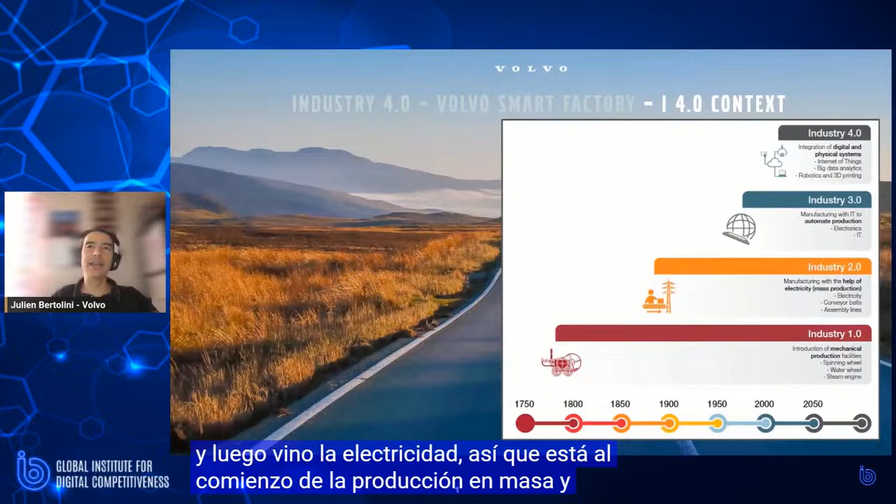And we can think, when we're thinking about Industry 2.0, we can think about Henry Ford, who was a big innovator at this point of time.

The third revolution is the digital revolution. So we are in the Industry 3.0 currently with all the numerical control. We can talk about the PLC, the programmable logic controller, also the enterprise resource planning, all the IT in the factory. And today we're going to talk about the Industry 4.0.

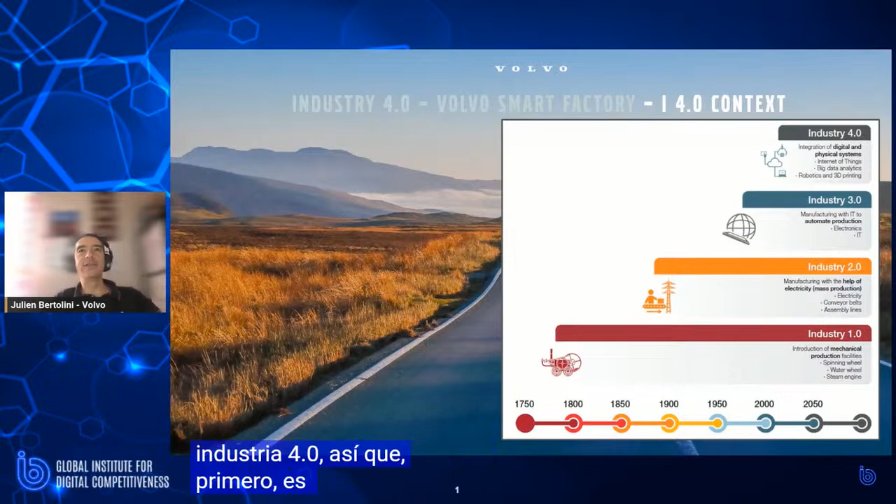So what is it? First, it's a bunch of new technologies. Of course we can talk about IoT, the Internet of Things - I love that because I'm an IoT expert. But there's also other technologies like 3D printing, all the immersive technology with augmented reality and mixed reality. We can also talk about artificial intelligence, about drones. So we have a lot of new technologies that are transforming our industry.

But mainly, the Industry 4.0 is also about customer needs. So it's driven by two things: the new technologies and the new customer needs. And what are these new customer needs? Basically, the industry should be able to produce faster with highly customized products and at a good price. So that's the three challenges for the Industry 4.0.

So now you got what it is and what are the challenges. So let's jump on how to do that - the vision for the Industry 4.0. We can summarize that in 4 pillars.

The first one is flexibility. So our production line should be flexible, meaning that with the same production line, we should be able to create different types of product. That's a big challenge. Second point is reliability.

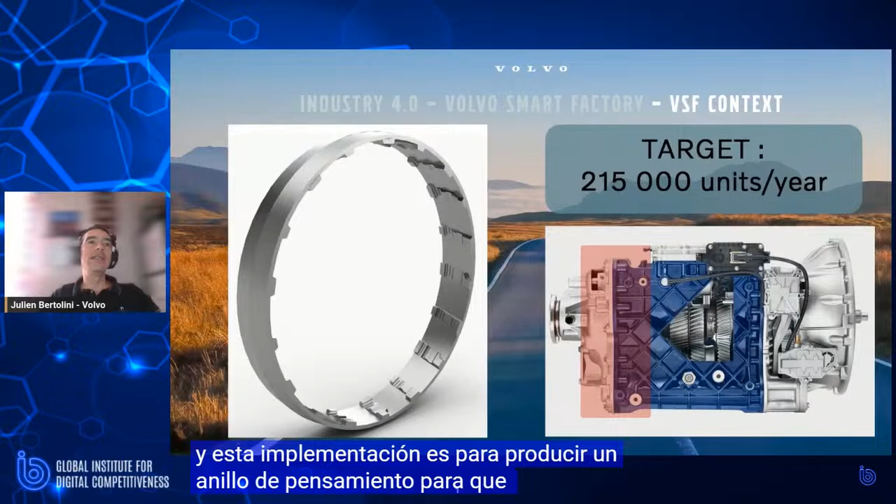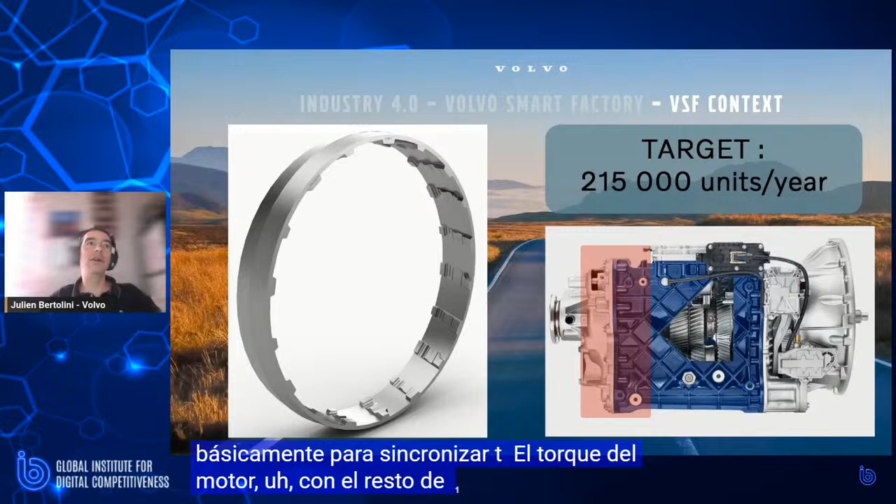And the first implementation is in Sweden, for producing synchro ring. So the synchro ring is this kind of part, and it's a really important part because you need this part in the gearbox, basically to synchronize the torque of the engine with the rest of the gearbox before going to the wheel and to the axles.

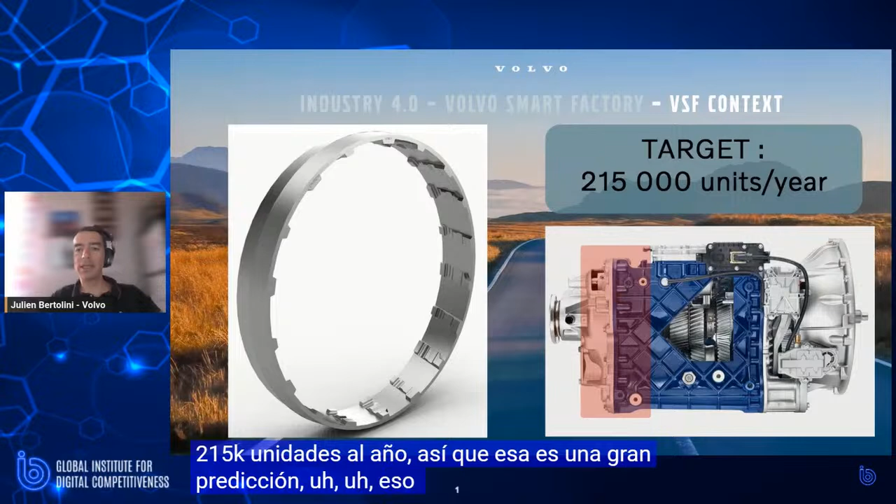So that's a pretty technical part, and we are producing different kinds of parts like that. The target for this new line is to produce 215K units per year, so that's a big production - really ambitious. And we have decided to rise to this challenge to implement an Industry 4.0 assembly line.

So as I told you, the first pillar for the Industry 4.0 is the flexibility. So how have we done that?

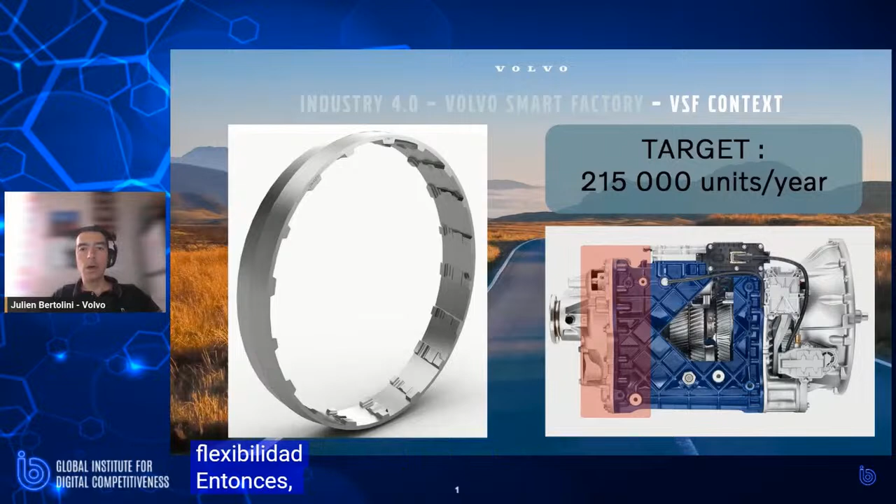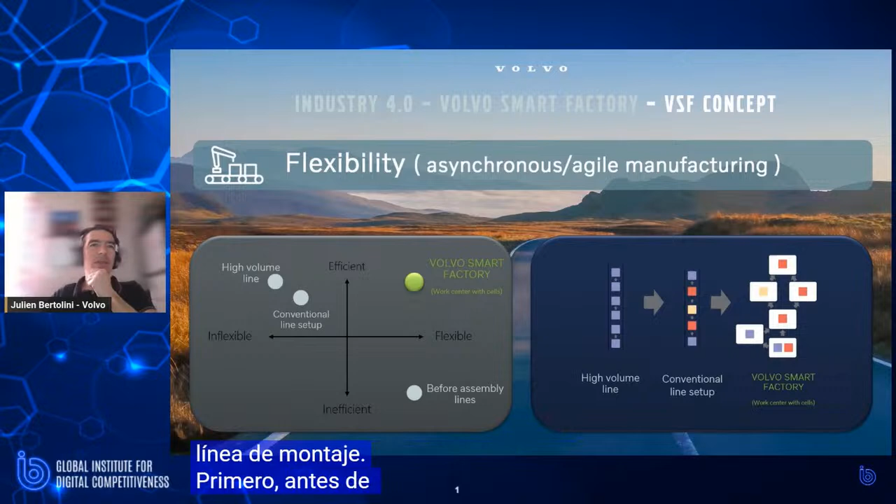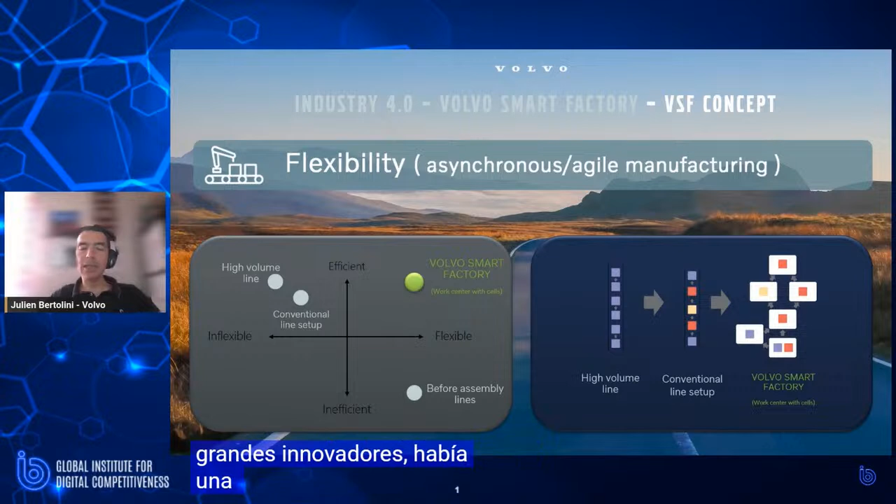So flexibility, if you can think about different kinds of assembly lines. First, before the assembly line, before Henry Ford and all these great innovators, there was just a single individual that would produce the parts by handling all the operations. So it was highly flexible, but not efficient at all.

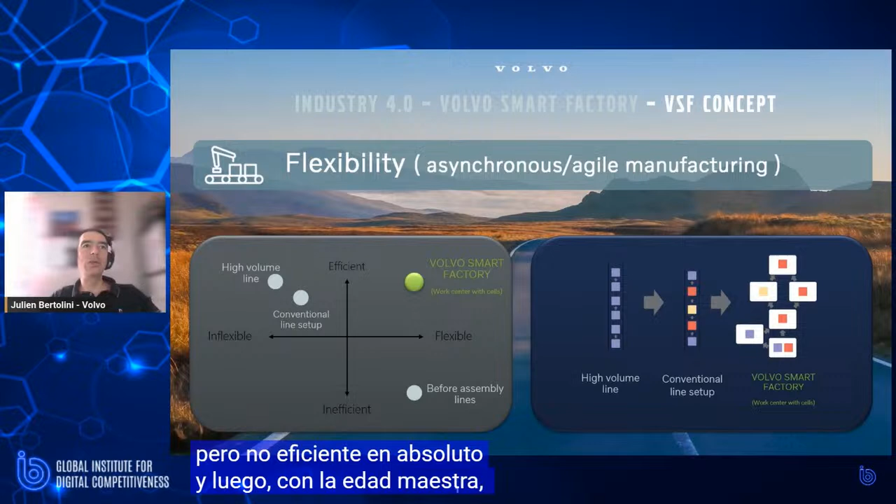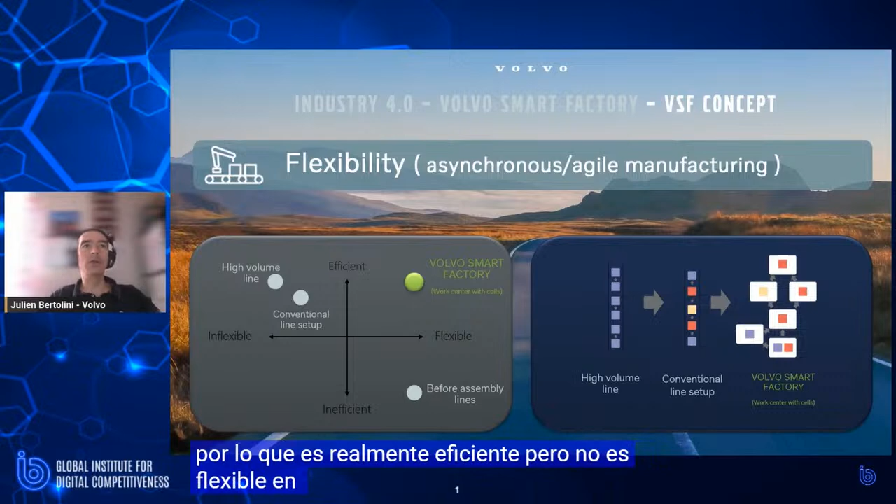Then with mass production, we know how to produce high volume lines. Basically, it's a line to produce standard parts in a very efficient way. So it's really efficient, but not flexible at all. You have to produce just a standard part or a standard product.

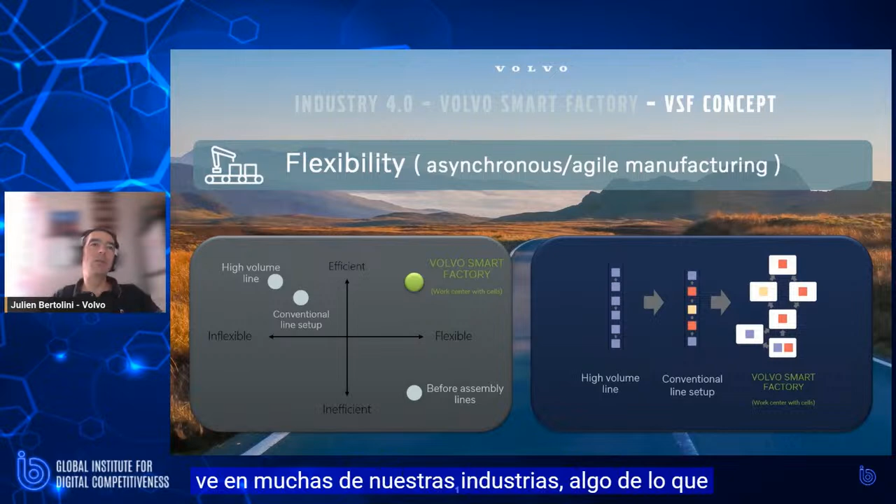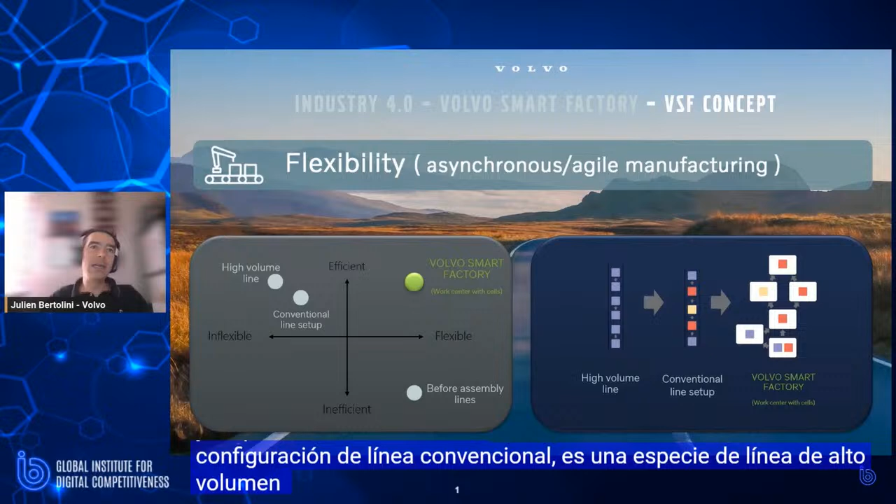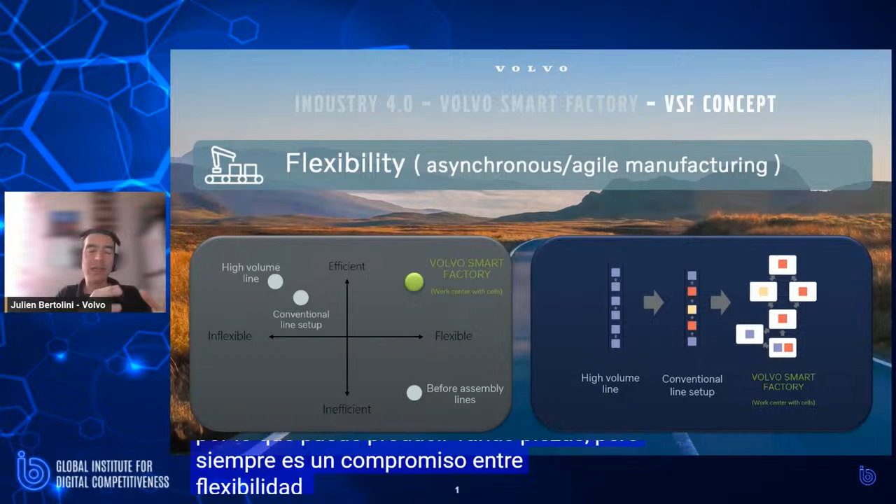Now we can see in a lot of our industries what we call the conventional line setup. What it is, basically, is a kind of high volume line but with some customization. So you can produce several parts, but it's always a compromise between flexibility and efficiency. You have to always make some compromise.

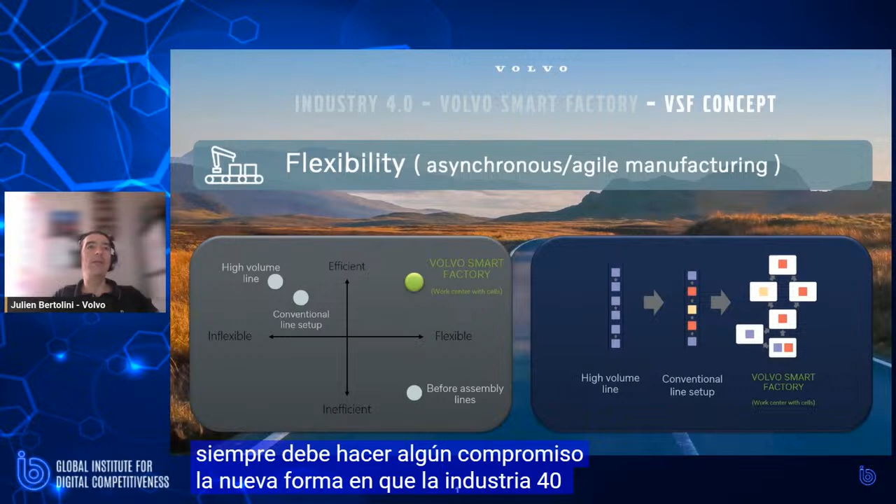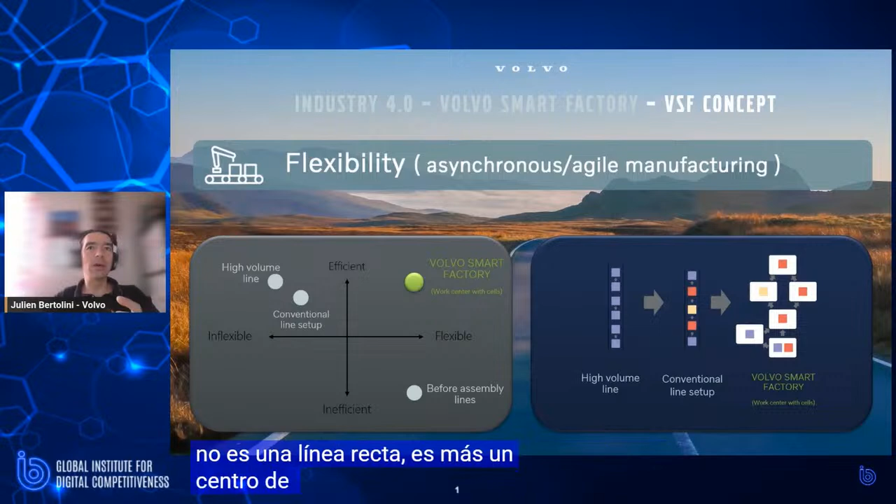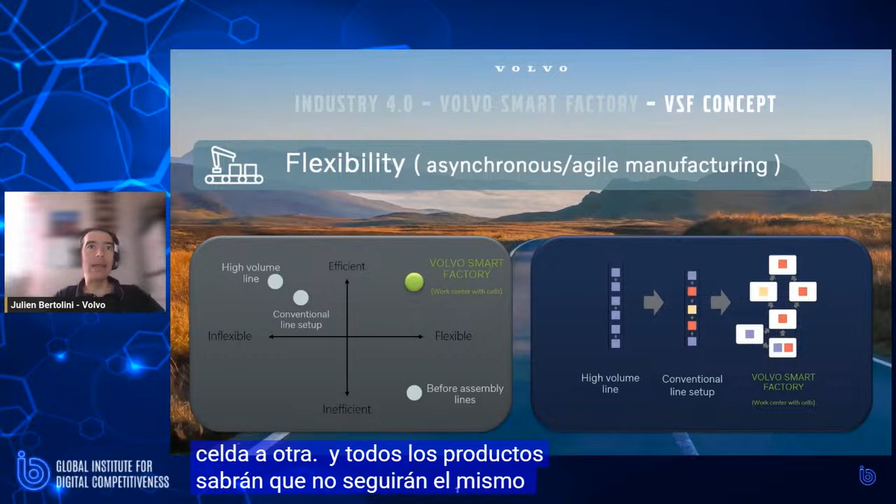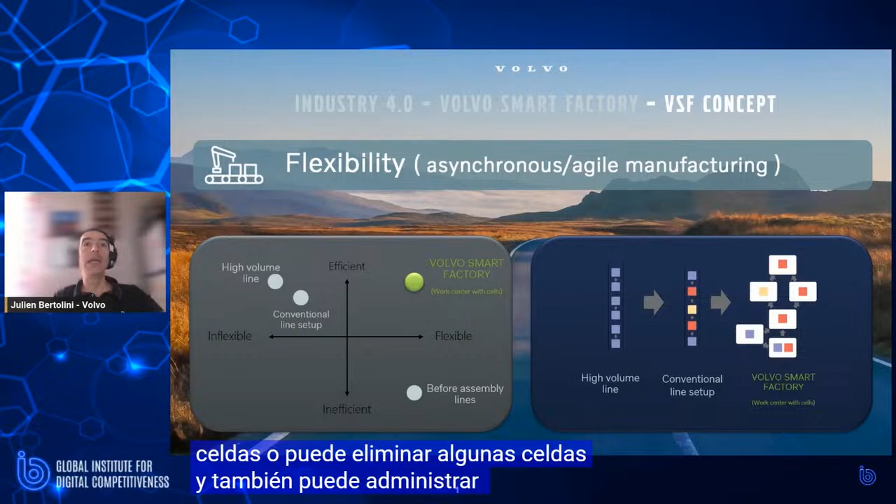The new way, the Industry 4.0 way of building an assembly line, is really different. You are building a line, but it's not a straight line. It's more a work center with different cells. As you can see in this schema, the product will go from one cell to another, and not all products will follow the same path. So it's really flexible, and you can add cells or remove some cells, and you can also manage the redundancy. Keep that in mind.

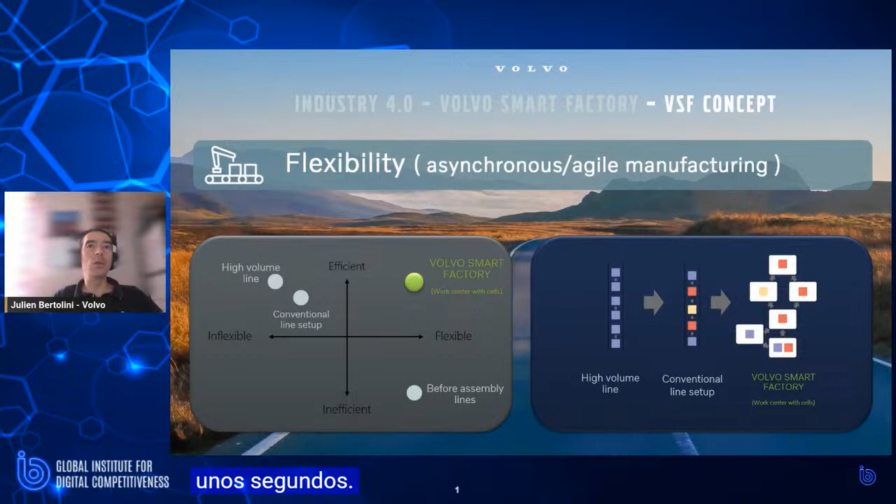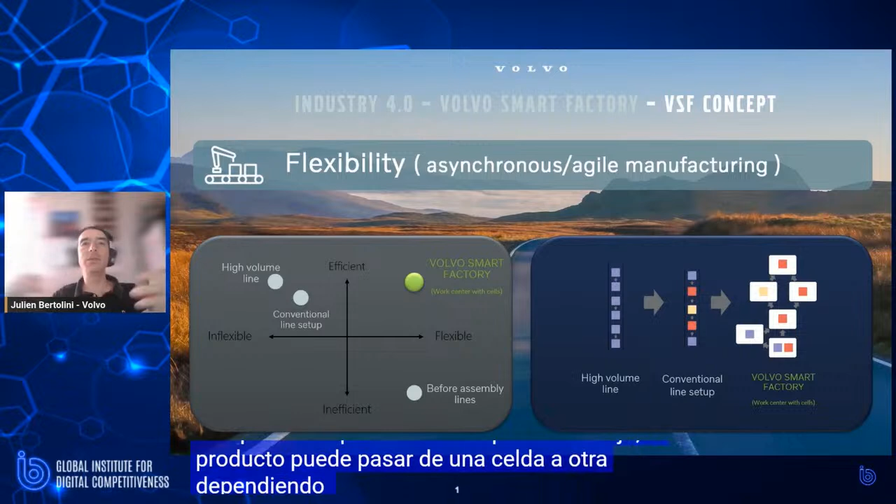I will show you concretely what it is in a few seconds. Just one word I forgot to tell you is asynchronous. Here, the work is asynchronous because you don't need to have a takt time with a fixed cycle time. The product can go from one cell to another depending on the cells available. So the cycle time is not fixed. It's asynchronous, and it's really agile.

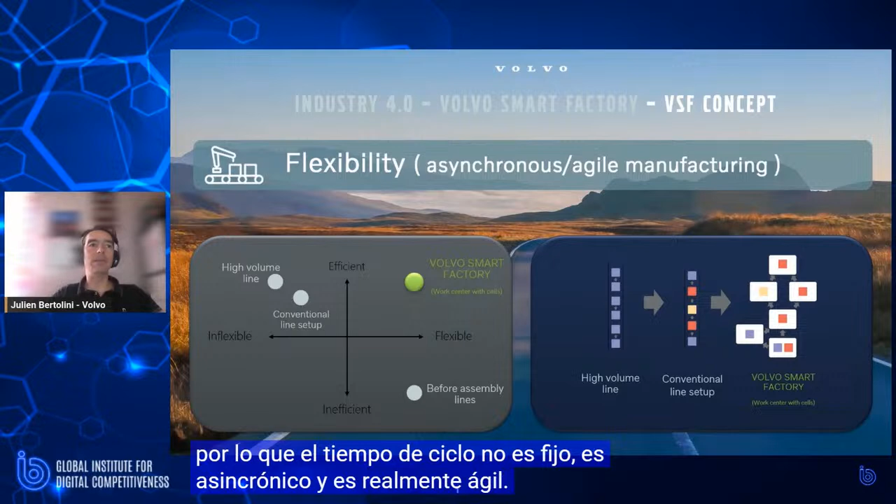About the other pillar, I told you about reliability. So how can you be really reliable? Of course, we have to do some redundancy of critical equipment, and I will give you some detail. You also need to be able to do predictive maintenance. Otherwise you will not be reliable enough.

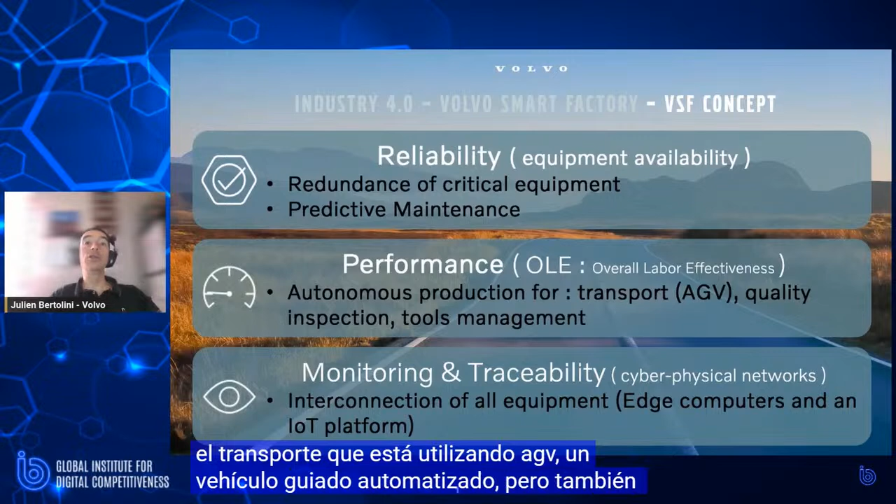For the performance pillar, we have chosen to put some autonomy in - the production needs to be autonomous. So you will see the transport uses AGVs, automated guided vehicles, but also the quality inspection is automatic, and tool management is automatic. I will show you that in detail.

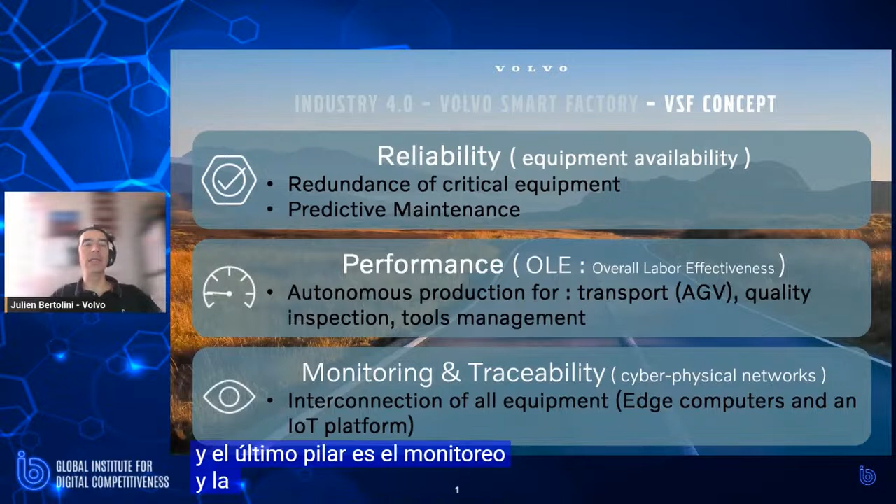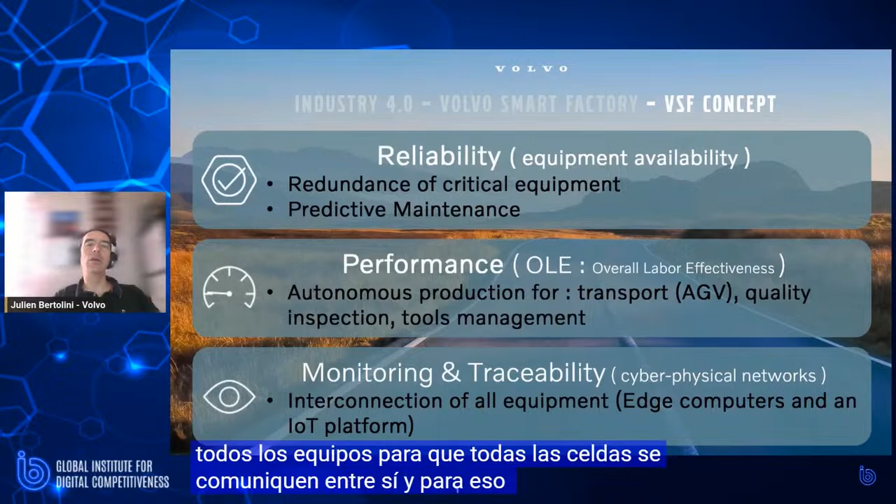The last pillar is monitoring and traceability. For that, you need to have an interconnection of all equipment. So all the cells should talk together. And for that, we are using some edge computing and an IoT platform.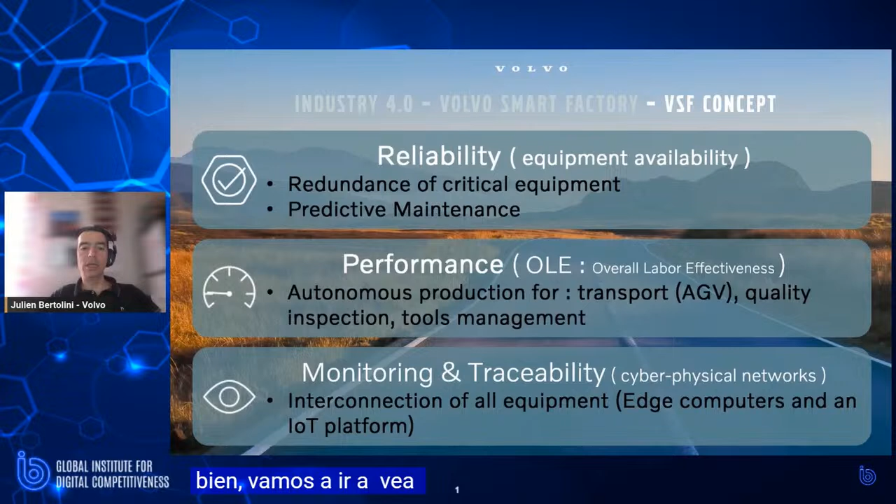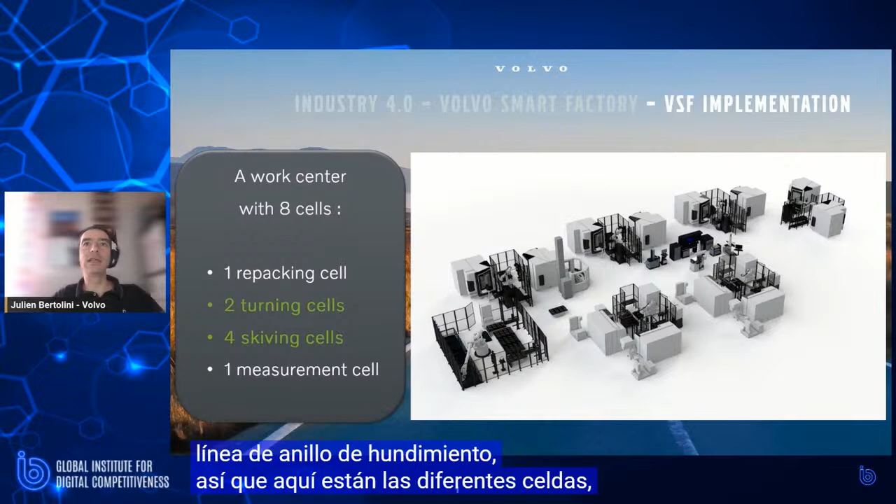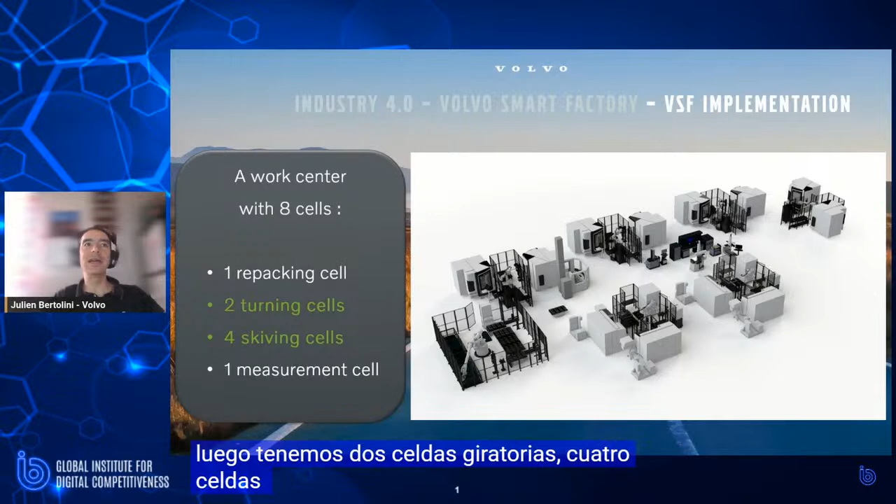Okay, let's go see the implementation. This is the implementation of this skiving ring line. Here you see different cells - there are 8 cells. One is called the repacking cell, then we have 2 turning cells, 4 skiving cells, and 1 measurement cell. So how does it work?

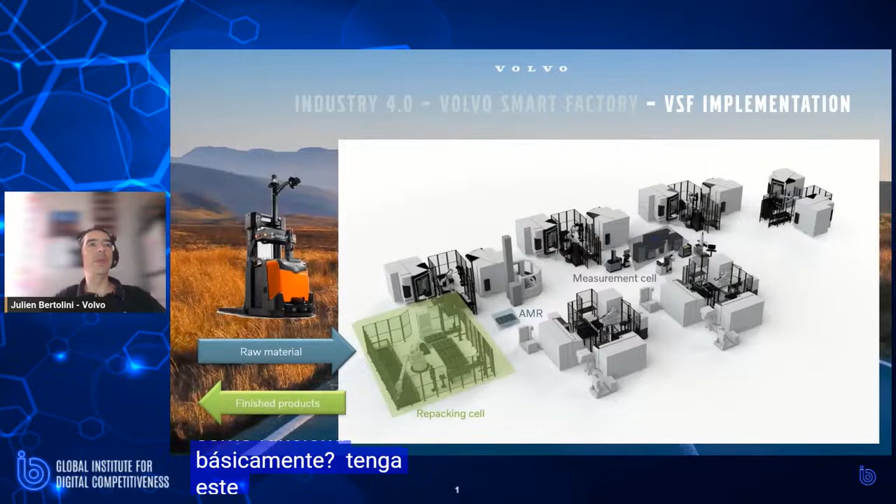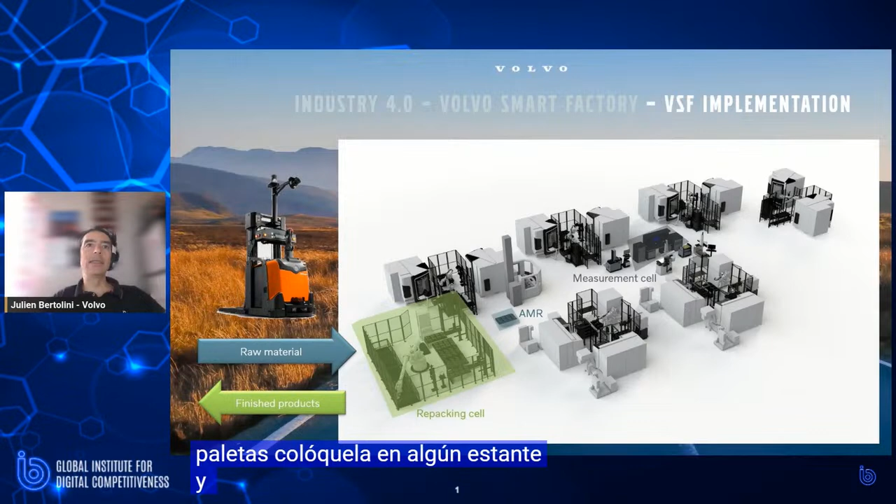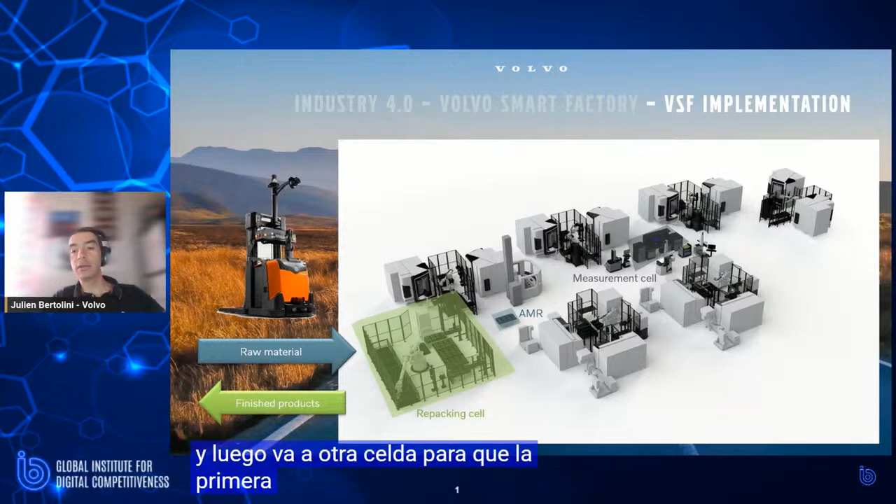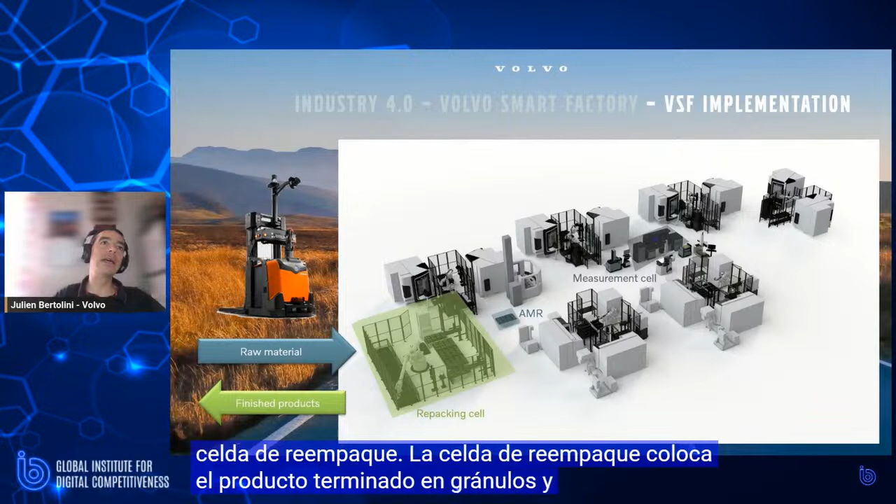Basically, you have this AGV, an automated guided vehicle, that is bringing pallets of raw material to the repacking cell. The repacking cell takes the raw material from the pallets and puts it into racks. Then an AMR, an autonomous mobile robot, takes the rack and brings it to the first available cell, and then it goes to another cell. By this way, the product moves from cell to cell, and then the AMR takes back the finished product to the repacking cell. The repacking cell puts the finished product onto a pallet, and the AGV takes back the pallets of finished products. So it's fully autonomous.

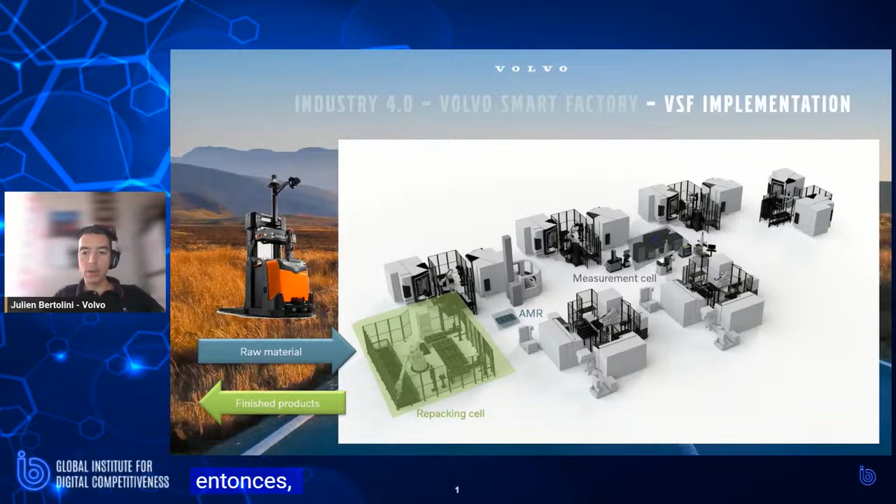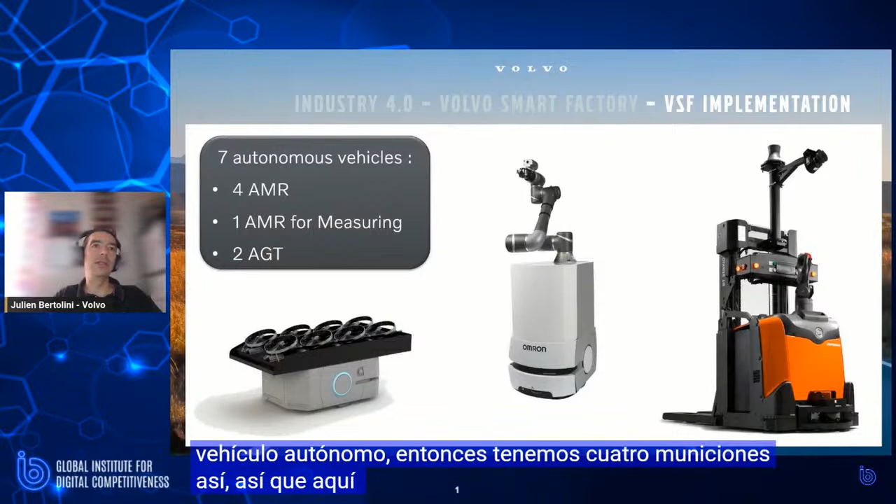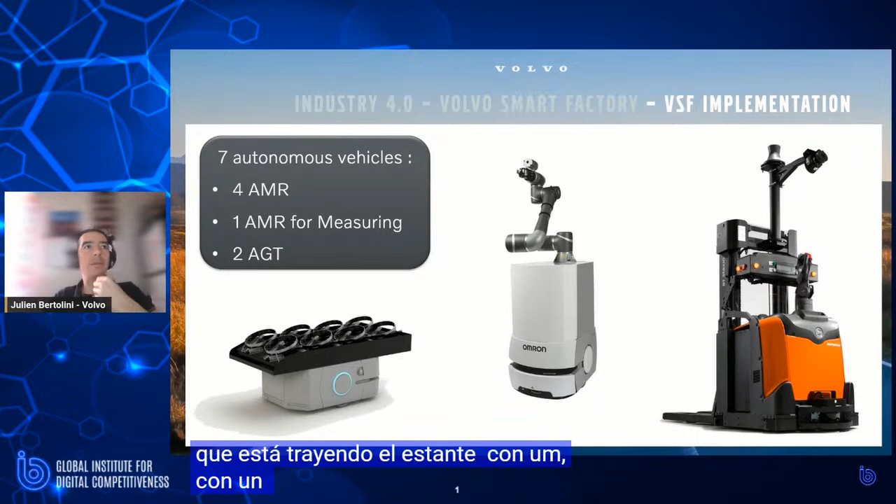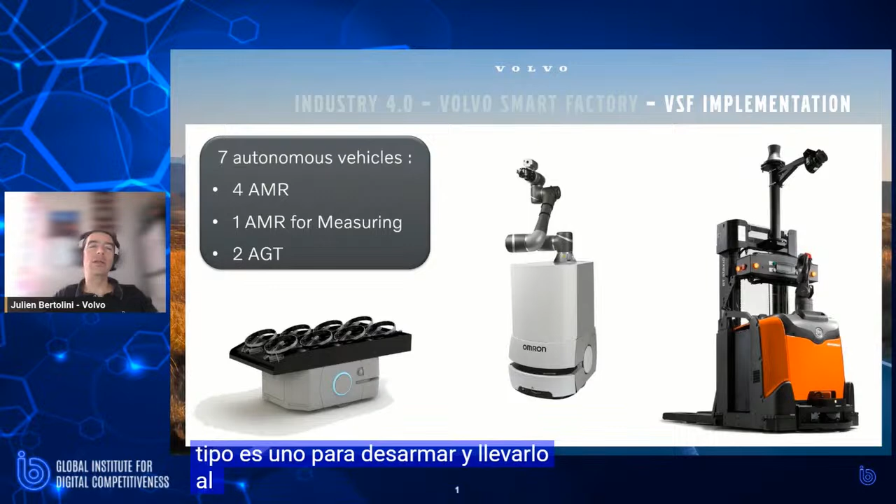So what do we have? We have some cells, and we also have some autonomous vehicles - we have 4 AMRs like that. Here you see a mobile vehicle that is bringing the rack with some synchro rings. We have 1 AMR for measuring - this one is able to take a part and bring it to the measurement cell. And we have 2 AGTs like that - this kind of vehicle can transport pallets.

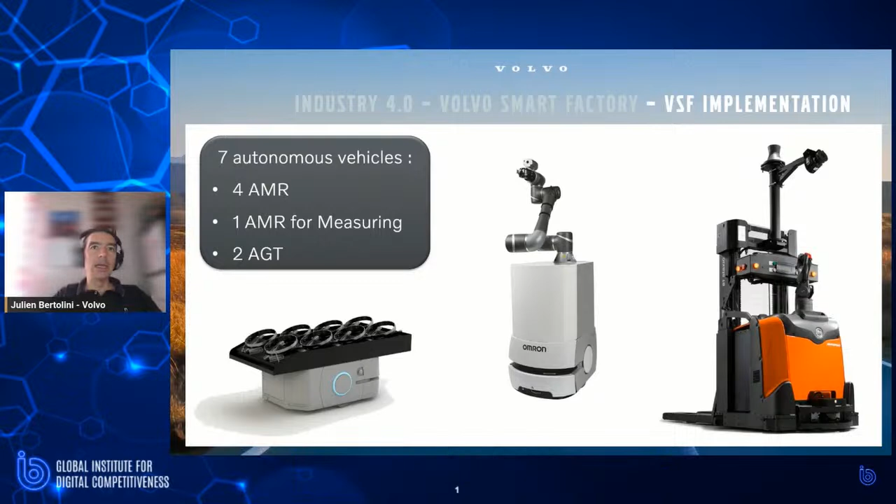Now I will show you a quick video. Please be really focused because it's less than a minute. It's really short.

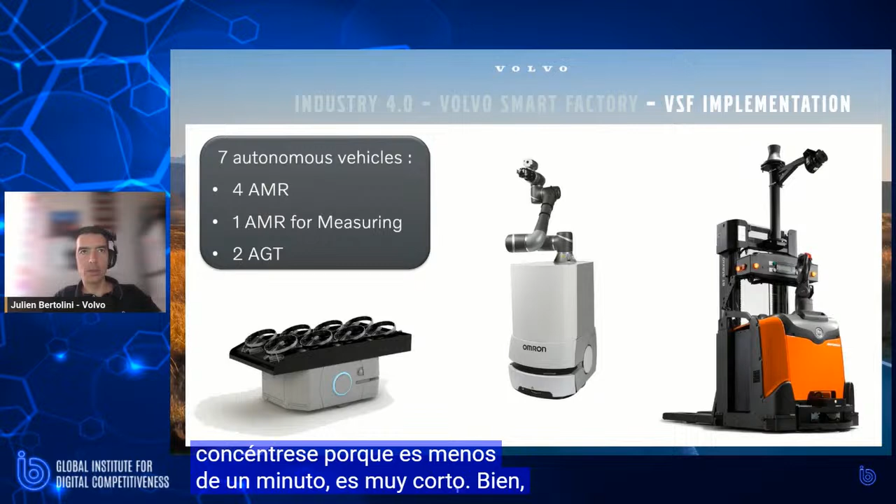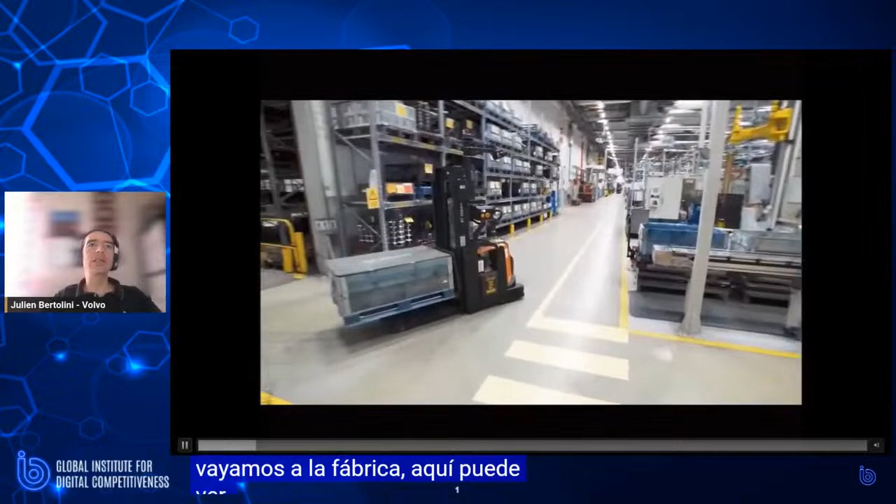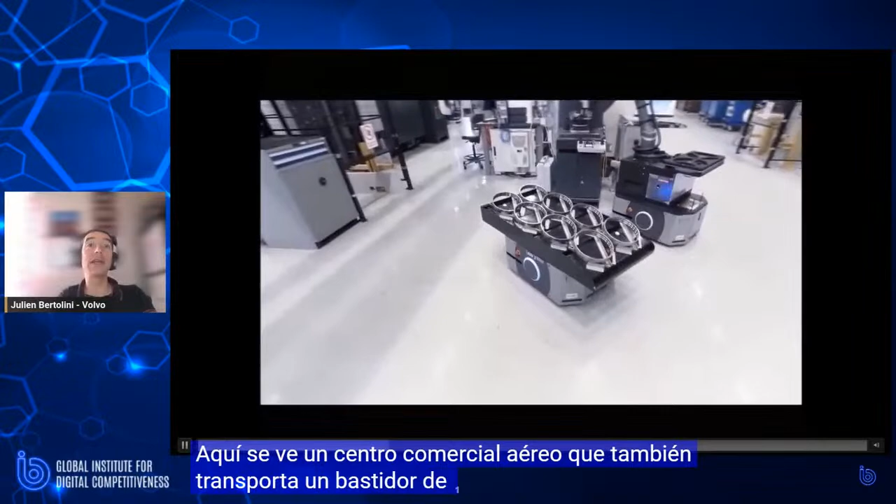Okay, so let's go to the factory. Here you can see an AGT, transporting a pallet in an autonomous way. Here you see an AMR that is also transporting a rack of synchro rings. This is a skiving cell, to produce the parts with some finishing. And here you can see the measurements AMR.

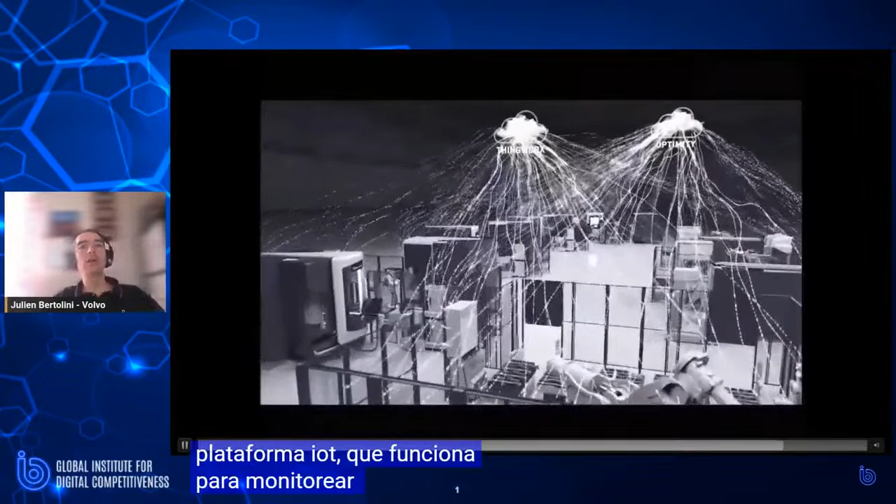All these cells are sending data to our MES, Optimity, and to our IoT platform, which is ThingWorx, in order to monitor and have traceability. So that was really short, but here you have seen a concrete example of the Industry 4.0 implementation.

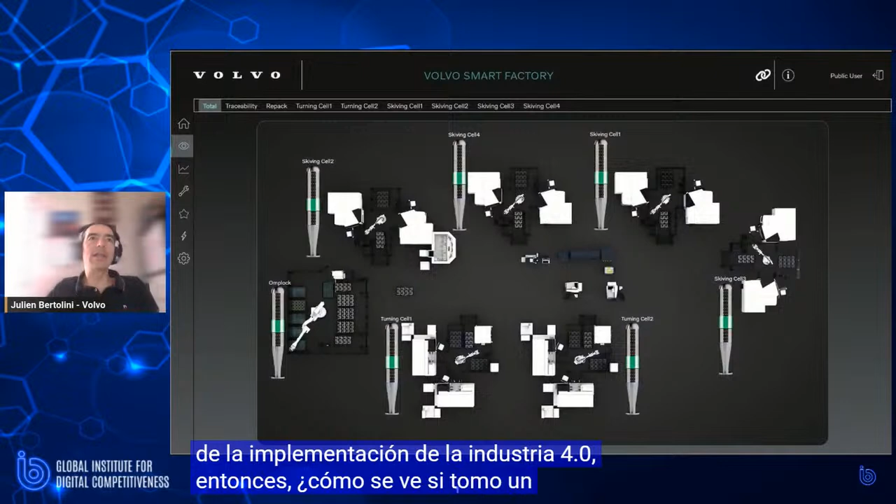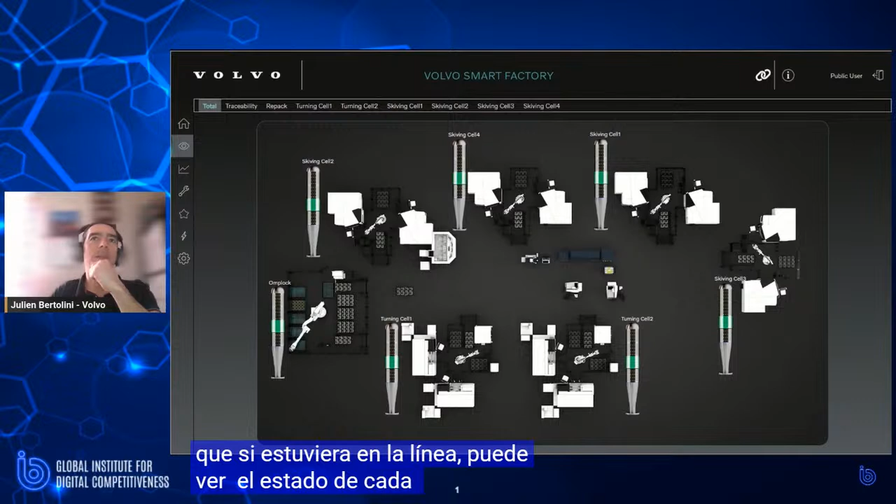So what it looks like, if I take a look at the IoT application, I can see some screens like that. And what do you see here? Basically, you see each cell with the stack light. By looking at the screen, you can see exactly the same thing as if you were on the line. You can see the status of each cell. And here everything is green, so it means the line is working properly. You don't need any maintenance.

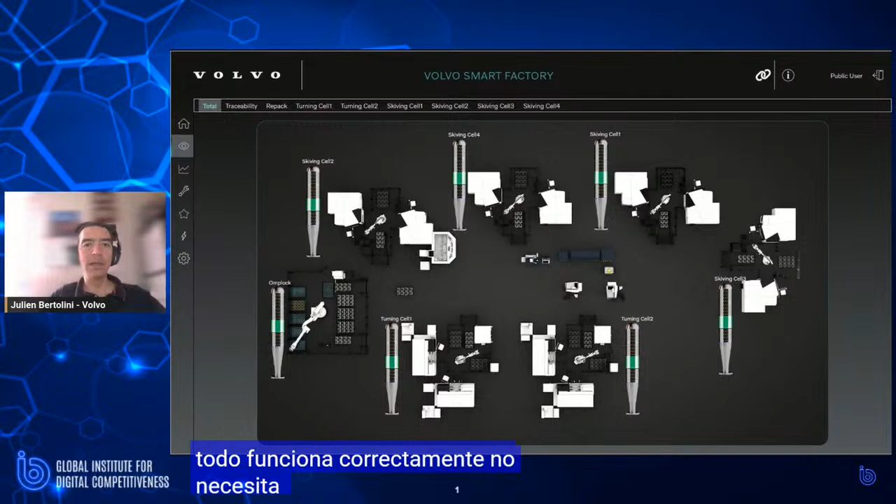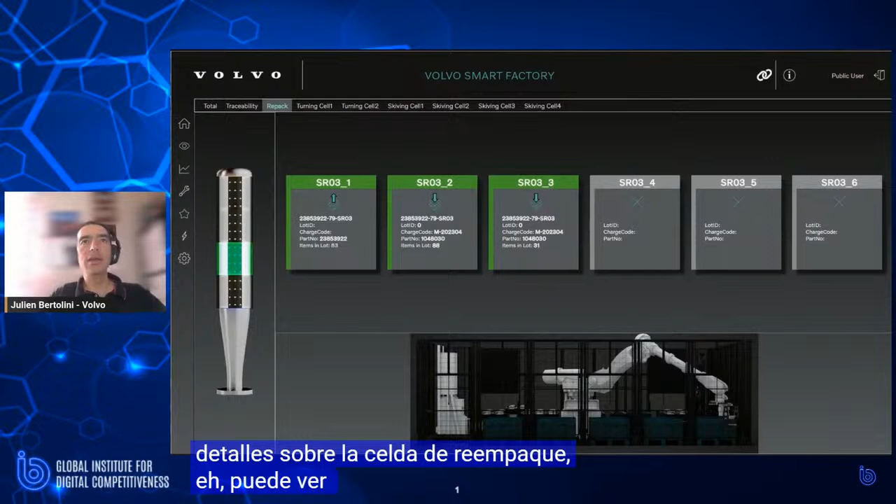If you click on, for example, the repacking cell, because you want some detail about it, you can see here the storage area. You can see a lot of detail about each area, for example, the part number being produced, the number of items in the lot, and if it's an inbound or an outbound storage area. So some info about it.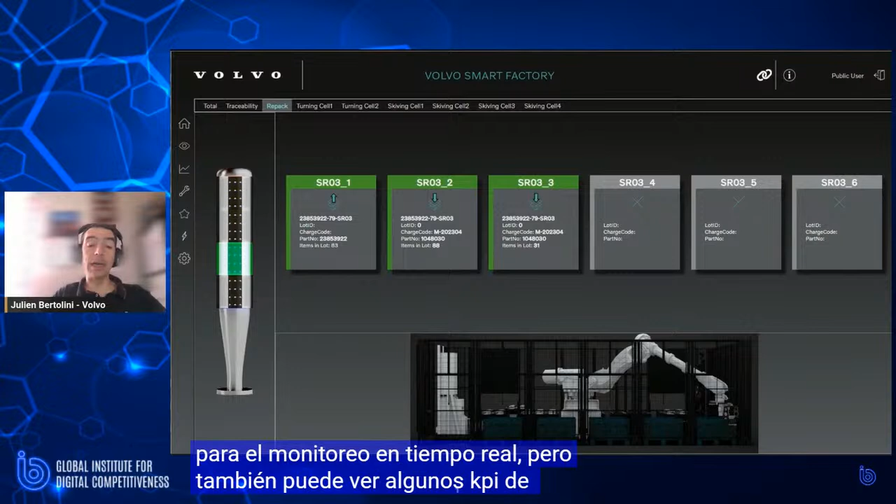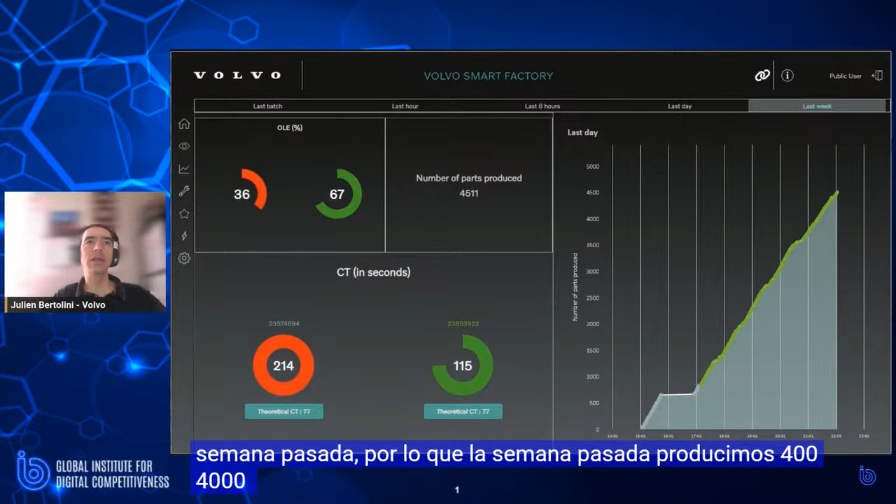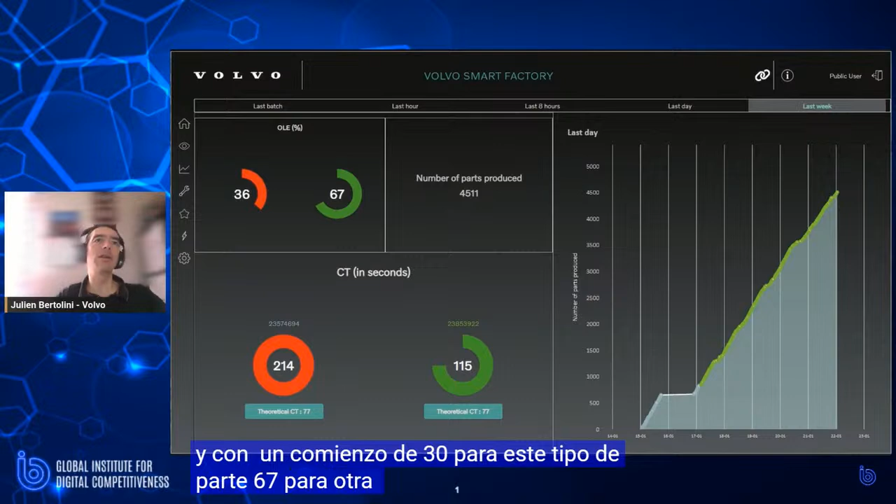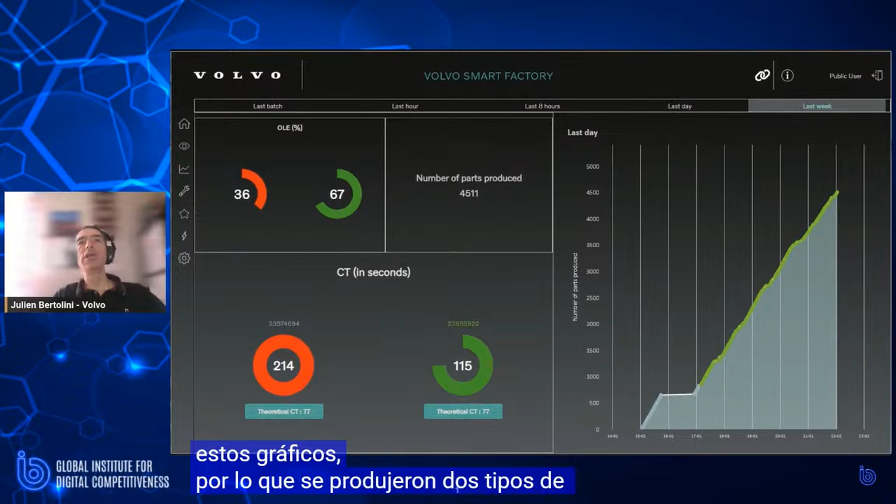So it's for real-time monitoring, but you can also see some production KPIs. For example, this is an example from last week. Last week we produced 4,500 parts, with an OLE of 36% for this type of part, 67% for another part. And here you can follow the cycle time, and we can see what happened on these charts. So two types of parts were produced, and we can follow the production.

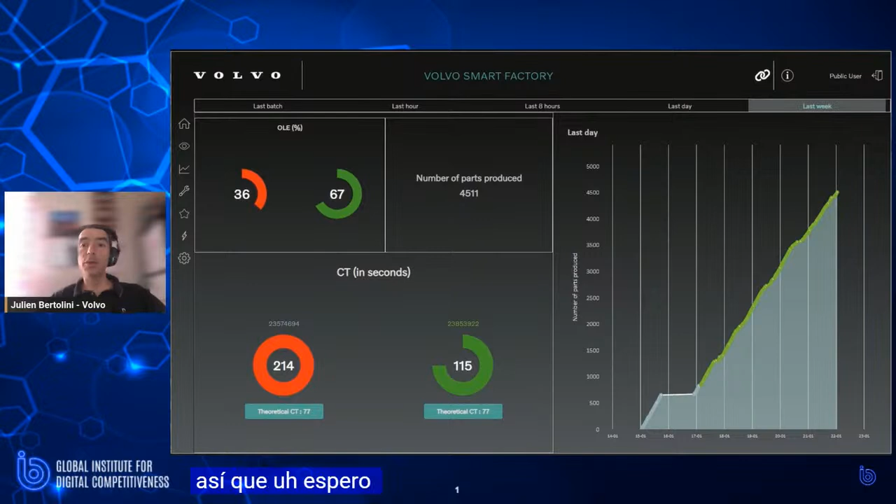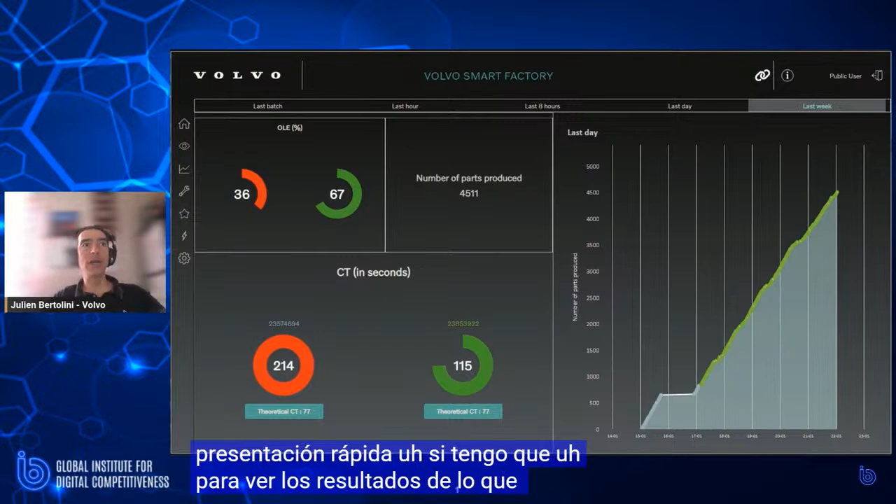So I hope you enjoyed this quick presentation. If I have to see the result of what we have done with this implementation, I will summarize by saying that first, for the high performances, the challenge is done, because the target of 215k parts per year is okay. We are producing at this pace, so we are really proud of that.

But the flexibility—we are able to produce different types of sync rings, so that's also a great thing about this line. It's a really reliable production line. The maintenance team told me it's robust and simple to maintain and to upgrade. So we are really proud of that. That's why I put this quote.

And finally, I would say it's really data driven, because we can see that we can real-time monitor all the line, and all the data are centrally stored. So it's really easy to have a great overview about what happened on this line.

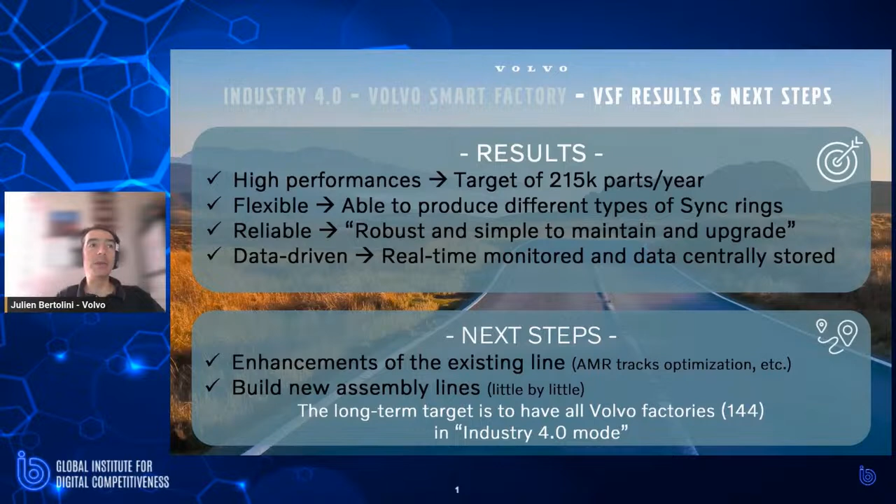So what are the next steps? The next step is first some enhancement on the existing line. For example, we know that the AMRs, or the autonomous mobile robots, the tracks are not optimized. So we would like to do some optimization, some other little enhancements that we can do.

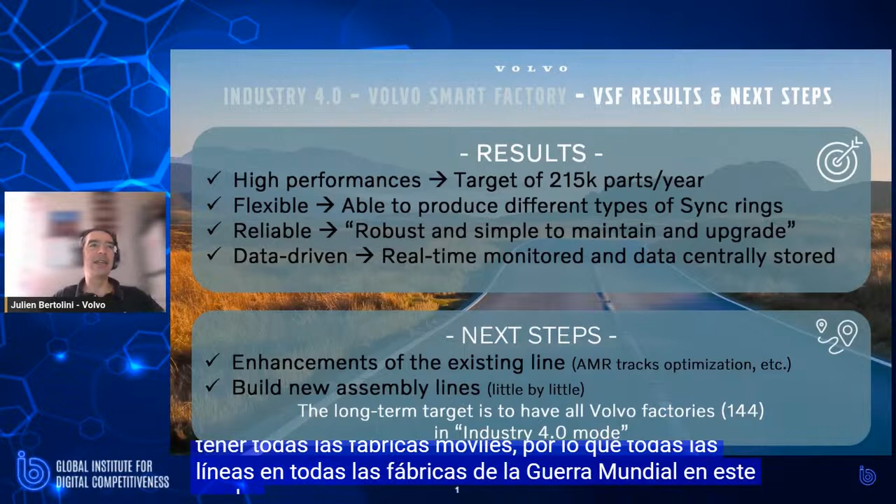And definitely that is a great example to build new assembly lines. So little by little at Volvo, in the Volvo factories, we will build new assembly lines by following the same principle. The long-term target is to have all Volvo factories, all the lines in all Volvo factories, in this Industry 4.0 mode. We have 144 factories at Volvo, so it will be a long journey, believe me.

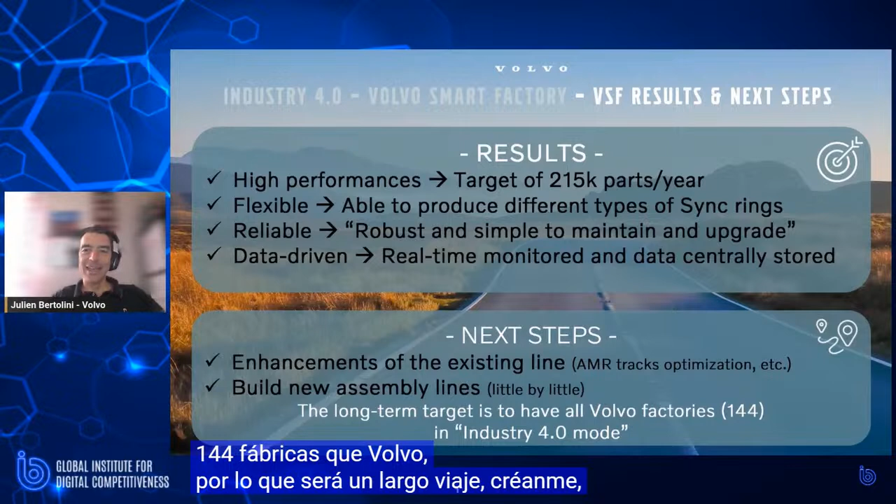So let me give you some key takeaways before ending this presentation. The Industry 4.0 will bring us some agility. We will be more flexible, and by being more flexible, we can accelerate the response to customer needs.

It brings also an increase of efficiency in the production. So all the production KPIs will be better with the Industry 4.0. Same thing for the quality. By having an automatic quality inspection, it gives us a lot better quality assurance.

And then last but not least, is more potential for innovation. Because if you think about having a production line in cells, you can easily modify one cell or duplicate another cell, or you can reorder your process really easily. That's the beauty of this new way of doing manufacturing. So I hope by seeing a concrete implementation that you have a better understanding of Industry 4.0. Thanks a lot.